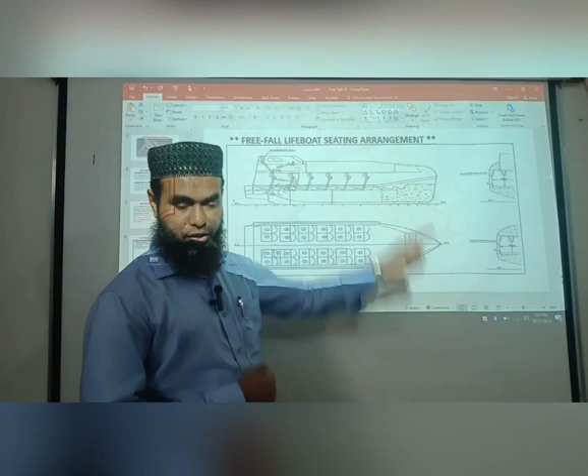Now coming again to simulated launching of free fall lifeboat. I believe we can remember, we will not lower or allow the free fall lifeboat to fall into the water, but we will check or carry out the release mechanism's proper functioning or not.

How to do that? Number 1, check equipment and ensure that all components of the lifeboat and launching appliances are in good operating condition. Number 2, establish and maintain good communication between the assigned operating crew and the responsible person. Ensure the lashing unit and auxiliary lashing unit are connected to the lifeboat properly. I repeat, this auxiliary lashing unit or simulated lashing unit must be rigged properly. This is to be ensured without fail.

Now the participating crew will go inside the lifeboat, take their seats, and fasten their seat belts accurately. After that, with the permission of the responsible person, the assigned crew will operate the release mechanism. Once the lifeboat is released, it will travel down the ramp to the distance specified in the manufacturer's instructions. After the simulated launching procedure testing is over, we need to take back the lifeboat to its stored position, and for that we'll have to use the davit, which will come later on.

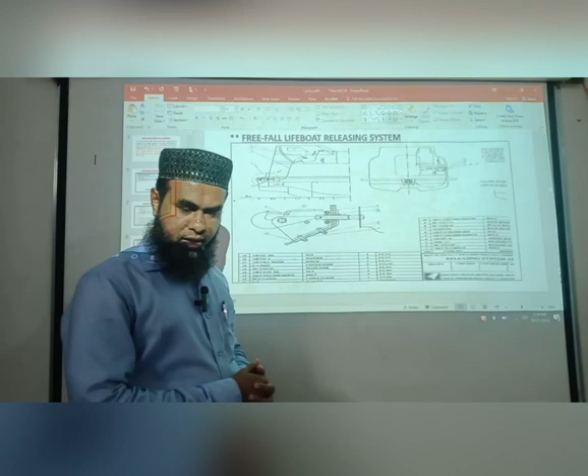This is called the free fall lifeboat release system, with the release hooks similar to what I saw on my last ship. This is the external outside view of the free fall lifeboat, and this is called the internal arrangement of the free fall lifeboat.

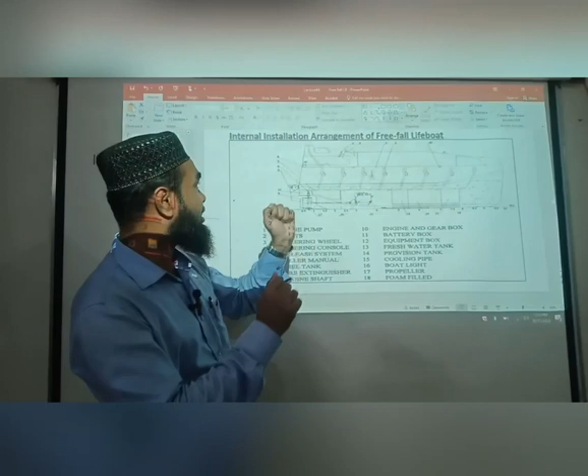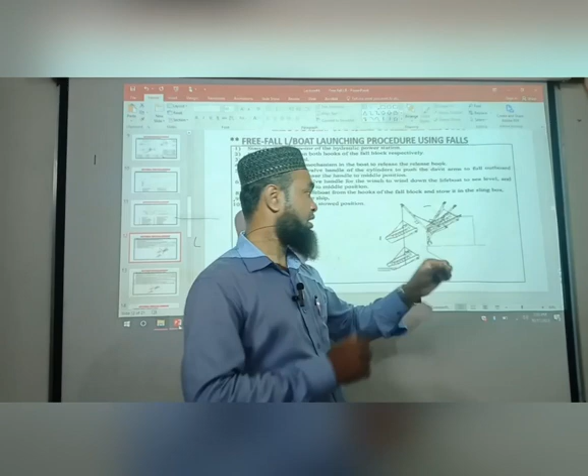Now we will carry out the free fall lifeboat launching by means of davit. What is the procedure? Number 1, start the electric motor of the hydraulic power station. Number 2, hang up the sling on both hooks of the fall block respectively. The lifeboat has a lifting sling that should be put inside the block of the davit. After that, we take the weight slowly, not too much, just on the davit.

Now operate the release mechanism in the boat to release the release hook. The assigned crew will go inside and release the release hooks. What happens after that? The boat is totally taken by the davit.

Using the fall wire, we will swing the davit to the outboard side with the lifeboat. Once we see that the lifeboat is coming up too much from the ramp, we lower the lifeboat to keep it along the ramp. Finally, when the davit is fully outboard side with the lifeboat, we stop operation of the davit.

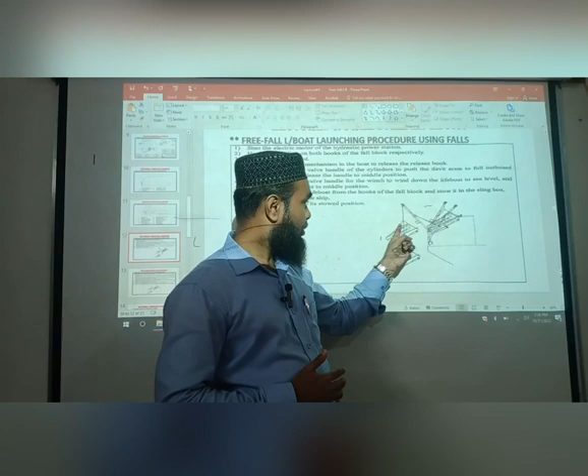Then keep lowering the lifeboat into the water. Once it is in the water, the crew will go either by embarkation ladder or by rescue boat. They will release the lifting sling from the block, and the lifeboat is free for maneuvering.

Now coming to the free fall lifeboat recovery procedure using falls. After finishing the maneuvering, we bring the lifeboat just below the davit fall, and we put the lifting sling back to the davit fall block. Once it is properly put back, we keep lifting the lifeboat.

Once it is above the water, well clear from the safety limit, we start taking in the davit on both sides along with the lifeboat, being more careful about the swinging of the lifeboat in order to save the boat from any kind of damage. Finally, with the course of time, once the davit is in, the lifeboat will be in stored position.

Once it is in stored position, we have to reset the release mechanism. Once the release mechanism is reset, we make the davit free - there is no more function of the davit here. That's all about the free fall lifeboat recovery procedure using davit falls.

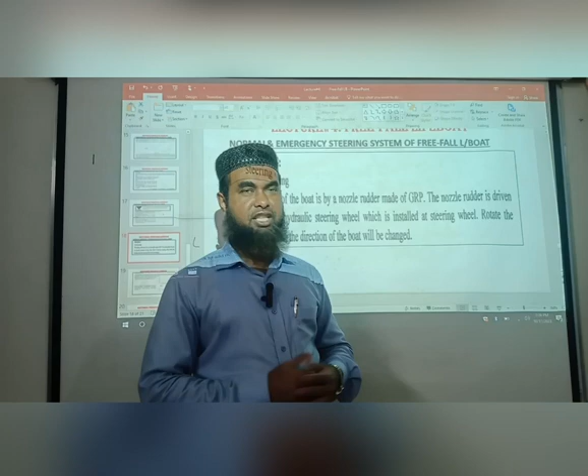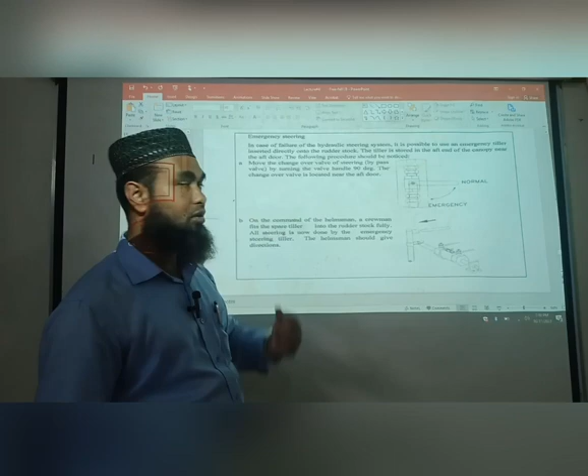Now coming to steering, the same thing applies. Normal steering is by the wheel, and if that is not working, we have to focus on emergency steering, which works similarly. It may vary from manufacturer to manufacturer, of course.

Here we can see the lever should be moved from normal to emergency. Put the spare tiller here inside and do the operation as required.

Before finishing the lecture, a gentle reminder: this sort of operation will not be carried out without doing a proper risk assessment first. Number two, an effective toolbox meeting with all crew on board the ship must be done, where we discuss any incidents that have happened about lifeboat lowering and maneuvering in the water.

Weather conditions must also be taken into consideration, and all crew must be properly rested. Of course, we will take permission from the local authority for lowering and maneuvering the lifeboat.

We can see that every 3 months, the free fall lifeboat is lowered into the water without any operating crew inside, by means of the davit, and maneuvering is done. Last point: every 6 months, we carry out the simulated launching of the free fall lifeboat.